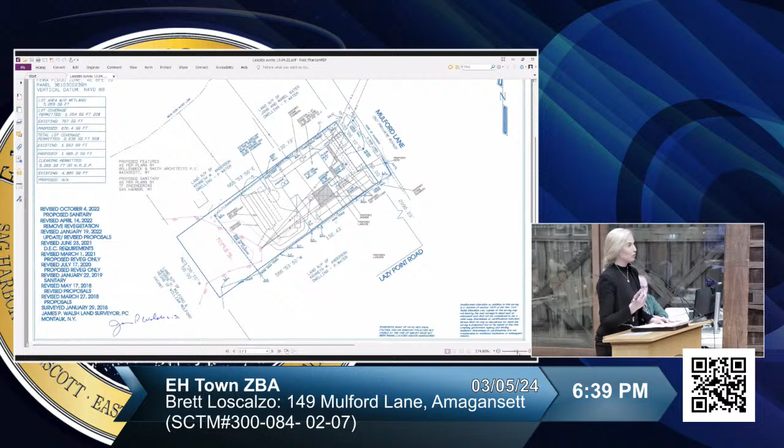Good evening, Chairperson and board members. I'm Deborah Choron of Matthews, Kirst, Cooley, and Choron, here representing Brett Loscalzo, the owner of 149 Mulford Lane. I appreciated the opportunity to make a presentation to the board in late November, and we took your comments to heart and made a resubmission last week.

Our resubmission included three main things. We have a revised revegetation plan prepared by North Bar Property Management dated February 15th, 2024, which includes revegetation using native species in the amount the planning department was seeking, 2,000 square feet. That revegetation is carefully designed to still permit the new IA system and also to preserve the specimen tree in the backyard, which we're hoping we can still do.

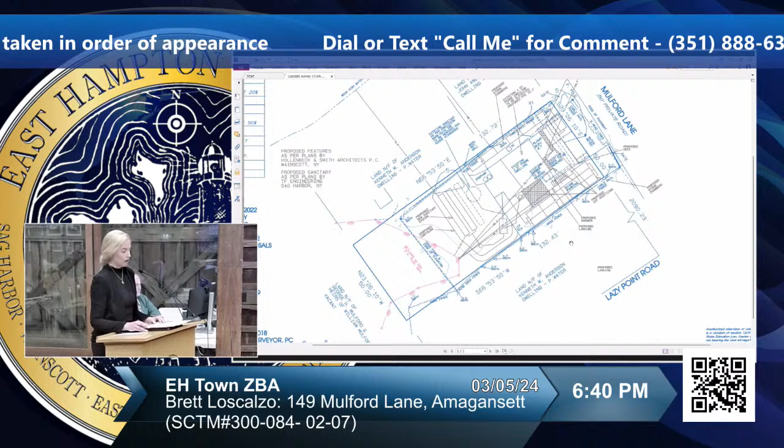An expert report prepared by David Rhodes of TF Engineering, dated February 27th, 2024, includes a thorough analysis of the property and confirms that the location of the proposed improved sanitary system is in the most conforming location to achieve our shared goals for this site. A construction protocol was also prepared by Paul DeLandro of DeLandro Andrews Engineering, dated February 26th, 2024, which serves as an outline for the proposed construction to minimize any potential adverse impacts to the surrounding areas.

So the planning department's chief concern had been the proximity of the new IA system to the wetland. And I've always taken David Rhodes, our expert, at his word that the proposed layout was the most complying location to achieve the goals of both Suffolk County and the Town of East Hampton. In case there was any doubt, David did an amazing job putting together a detailed report showing his thoughts on paper. He essentially prepared renderings of what it would look like if he tried to design the system in the front yard or either of the side yards.

And even at a quick glance of those renderings, it explains, I think, why David settled on the proposed location, and why the proposed location is not only most compliant with the law, but also achieves the shared goal of minimizing the impact to the wetland. David is here to field any questions about that, but I can also get into it a little bit if you have any questions.

For this application, it's once again worth highlighting that with the granting of this application, the property will remain well within its permitted gross floor area, within its lot coverage, its total lot coverage, and clearing. We also note that the applicant is offering this significant revegetation to bring the existing dwelling in compliance with FEMA and to install that upgraded IA system, which I think we all really want.

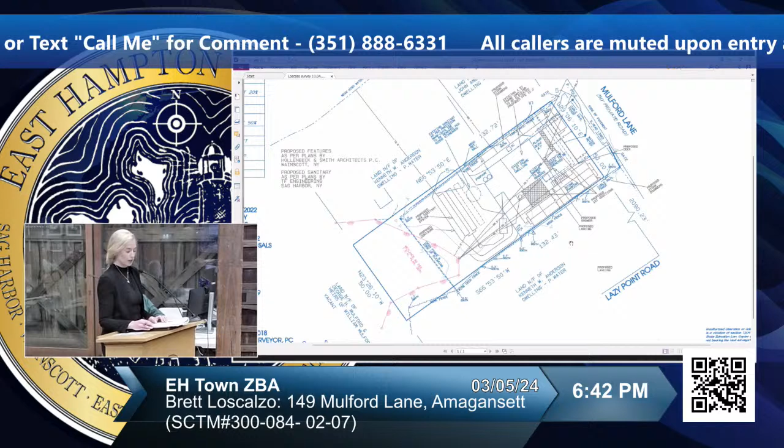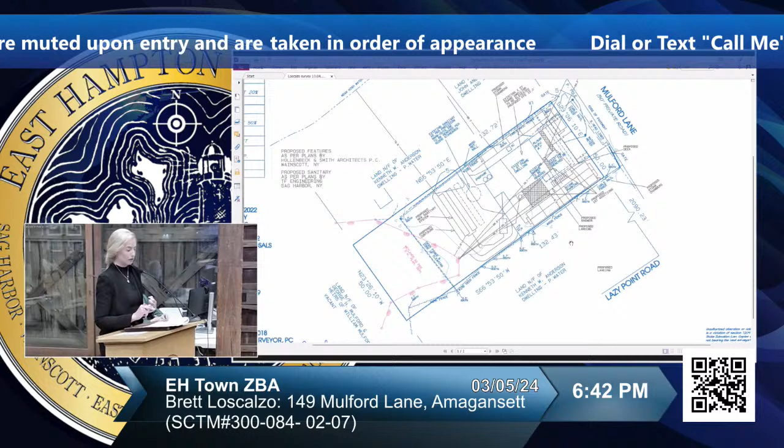Can you do me a favor? Can you just reiterate the list of conformities that you listed? You said this lot is conforming. Oh sure: gross floor area, lot coverage, total lot coverage, and clearing.

So we're not asking for any variances with relation to those big picture items. We're here because the entire property is within natural resources special permit jurisdiction, so any construction we're doing on this property would require us to come before you. Even if we were just looking to put in the new IA system, or do construction work that triggered a building permit, we would be before you.

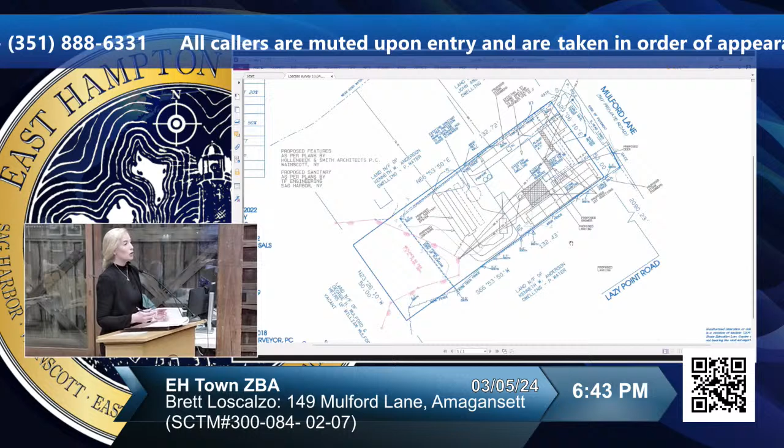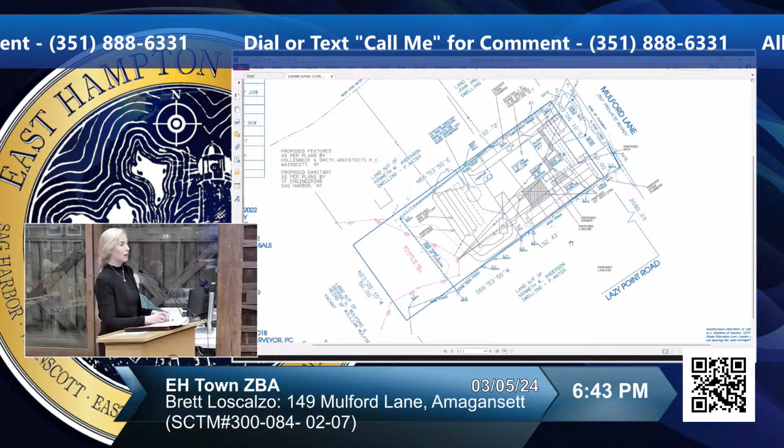So if you look at it in terms of that, we have a 160 square foot addition to a really small house, and we're coming in with FEMA compliance, re-veg, and a new IA system. The fact of what we're asking for really doesn't change the legal theory of this matter, because the addition and its location doesn't change where we could put the septic.

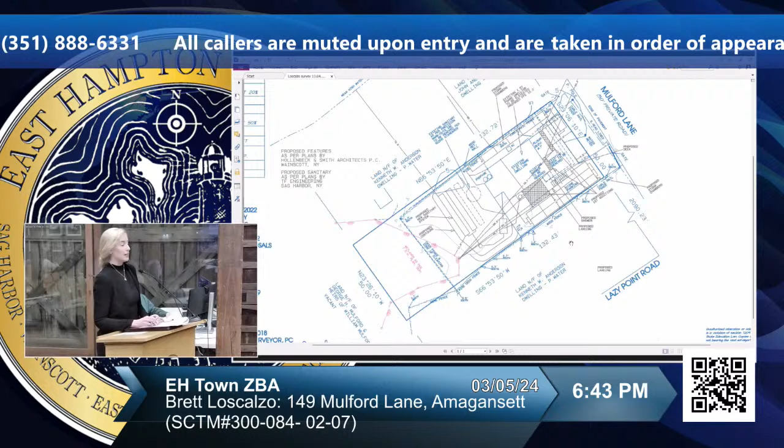But on the issue of the clearing, you're saying that it's conforming to clearing. Yes. But in the TAM, they're referring to an additional 2,000 square feet of clearing. Now, if it's in an NRSP jurisdiction and that was cleared without an NRSP, I'm not sure we can leap to the conclusion that it's conforming.

So right now, as it sits, it's not over-cleared. We're offering to remediate what the prior owner had done. We did concede that point, hearing your concerns and the planning department's concerns, so we're now offering 2,000 square feet of revegetation. That was in our submission last week. I hope that rounds out the application for you and addresses your concerns, because I truly see this application as a net benefit to not just the property itself, but the surrounding area.

Are you done? Yes, if you have any questions, I'm happy. David is probably best to answer some of them, but I'm happy to try.

Thank you, I have a couple of questions based on the building protocol that was provided. On page 5, in one of the first paragraphs, it says additional off-site parking will be coordinated and provided to keep the minimum disturbance to the area. It's a narrow road, we know how sensitive it is, we know how much damage can be done. My question is, how is that going to be provided?

You've said it will be provided. Is there going to be some parking area off-site? What do you have in mind? Typically that envisions that the company responsible for bringing work and materials to the site will coordinate so that employees are not bringing their own vehicles. So they'll coordinate coming and going from the site, and that would be expected.

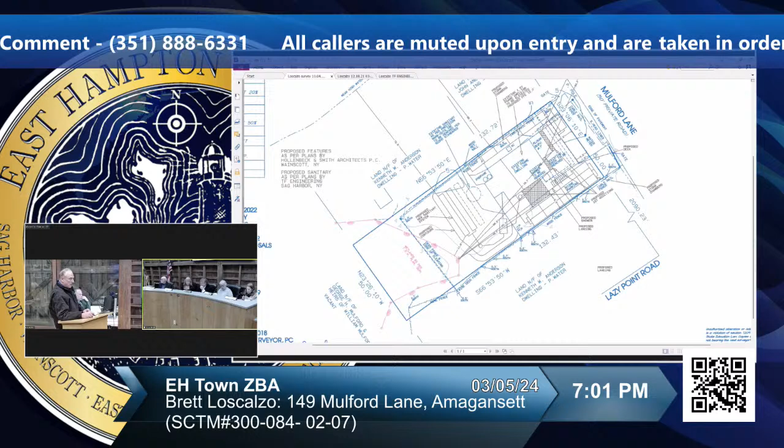I guess I wanted to show the render, if you could show us the render. The question I asked is, of all the interesting variations you provided in the septic options set of schematics, I don't think I saw one where — and again, I'm not trying to redesign the house for you — but it had come up that the bedroom addition on the southern side, in all the options shown, remains in the place where it is right now, as opposed to reconfiguring the additions to the house. Correct? Yes. So I just didn't know if you'd considered that.

Yeah, Brian, can you put up the exhibits? Do you have those? I didn't bring those, no. Oh, okay, we were going to be looking at that comparison on the screen. Okay, we have them.

So the addition is pretty small and kind of centered in the middle, so it doesn't really affect the west side or the east side of the house, and the septic systems have to be offset from the outside of the house. So that's why Deborah's saying it really doesn't matter on that addition, because that's not the most outlying part of the house that would be set back from the septic system.

Dave, are there bedrooms being added in this? I don't think so, no. Not according to the floor plan, it doesn't show that. It says proposed bedroom number 3. Was it a 3-bedroom house before? Is it a 3-bedroom house now? I don't have that information right now. It's on our other plan.

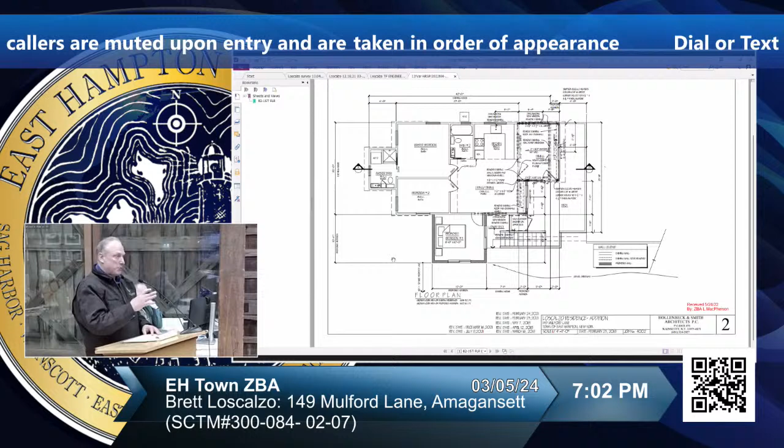So just going through the exhibits, I'll take you through them. If we look at the first exhibit on C1, that exhibit assumes the house is staying in its current location. It doesn't include the minor addition, because I wanted to analyze it without that addition in there. The only location that meets the health department standards is on the west side of the house, so that's why we showed it. That's what we've always proposed, and that's what the health department has approved at this point.

The second exhibit, Brian had talked about what would happen if we went away from the PSD and went towards a leaching pool or leaching gallery. You can see, in order to meet county standards, that layout pretty much takes up the entire property. There's really no room. Not only that, it brings up the retaining wall 3 feet along where the driveway is. Now you can't get up from the road.

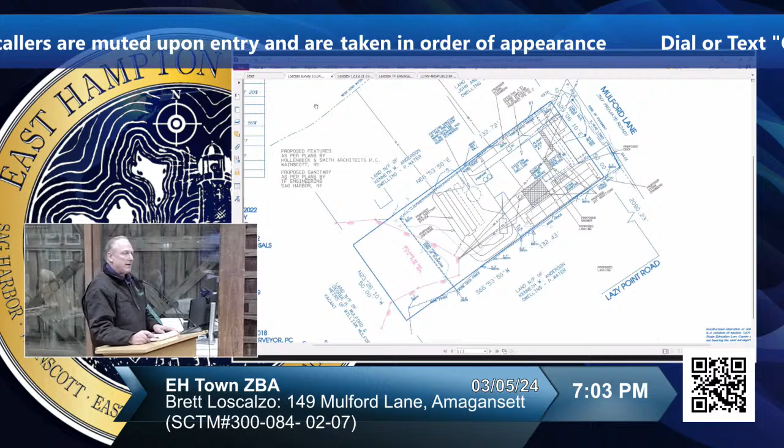So then the 3 and 4 on there. Now, as you can see, this would put the septic system in the front, but it's going to push the house back, so we're 9 feet away and 1 foot away. Our issue with that, and why we didn't even consider it, is because of the amount of disruption to construct a house within 9 feet of a wetland, pouring helical piles, doing helical piles, pouring grade beams and pile caps and all that concrete nearby. We think that would be pretty disruptive all the way right up to the wetland. So even when you're done, you've got 9 feet of buffer after you're done.

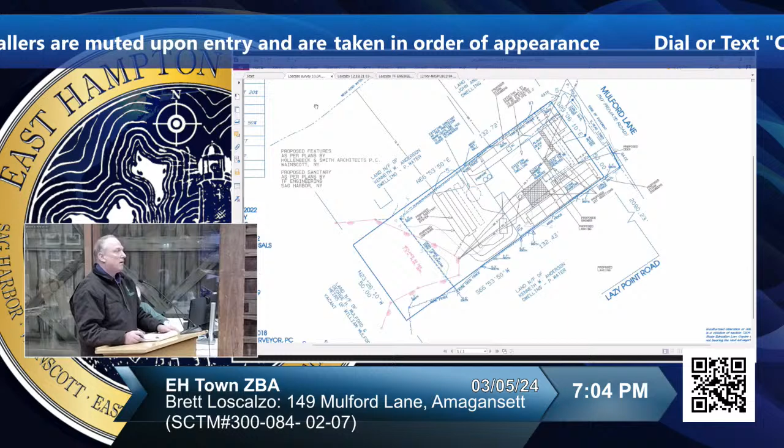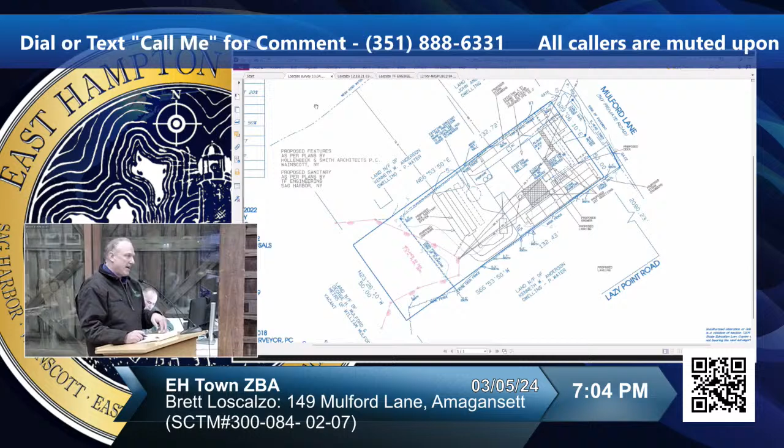So it's the other approach. We got an IA system. It's going to be reducing the nitrogen down from about 50 milligrams per liter down to about 12. You also have this pressurized shallow drain field, which will also do another layer of treatment and reduce the nitrogen even lower than that. So there would be 2 levels of treatment on this, the IA system plus the pressurized shallow drain field.

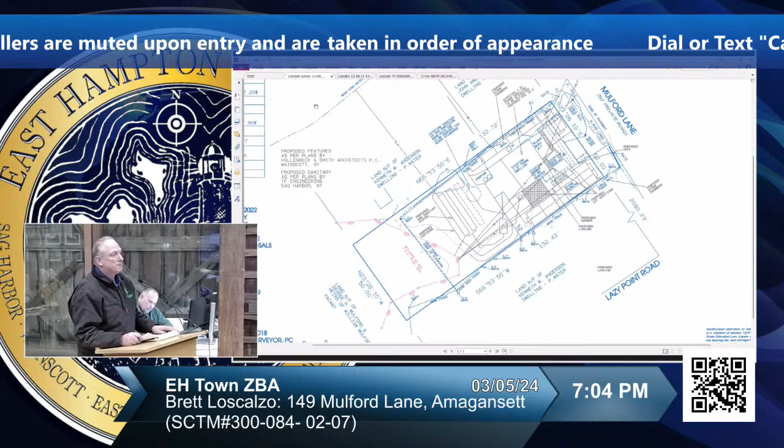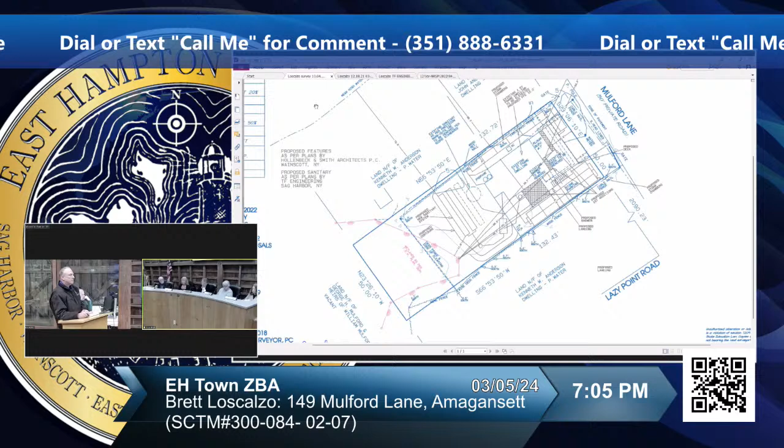So it appears, if I look at the first floor plan, that if there is a proposed bedroom 3, it appears to be an added bedroom because of the notation of the walls. You can see the walls being added, where the existing is outlined and the new is shaded walls. So it appears that there is a bedroom being added.

The smallest septic system the county is going to allow us to propose is 3 bedrooms. Yeah, I know, but again, we're looking at it from an environmental standpoint — is there going to be an intensity of use and stuff like that? Adding a bedroom, just like the health department looks at, could be an intensity of use.

The septic system is a 3-bedroom? Yes. On high groundwater, they do allow a 3-bedroom, but otherwise they normally require you to have a 4-bedroom. Okay, so there is a bedroom being added. Yeah, it's 110 feet of the 160 feet addition.

Okay, I have no questions. No, I have no — let's hear from Brian. I'm fine. Brian?

Good evening, board members, Brian Frank, Planning Department. Do you swear or affirm to tell the truth, the whole truth, and nothing but the truth? I do. Thank you. So just to review real quickly some of the major issues, or the primary issues, that were discussed at the hearing in November.

There were 4 issues really. One was the clearing and filling of the wetland that occurred, by all belief, prior to the current owner's ownership of the property, almost certainly between 2016 and 2018. The concern about the location of the sanitary system, which the planning department maintains very strongly — and I'll get back to that in a moment.

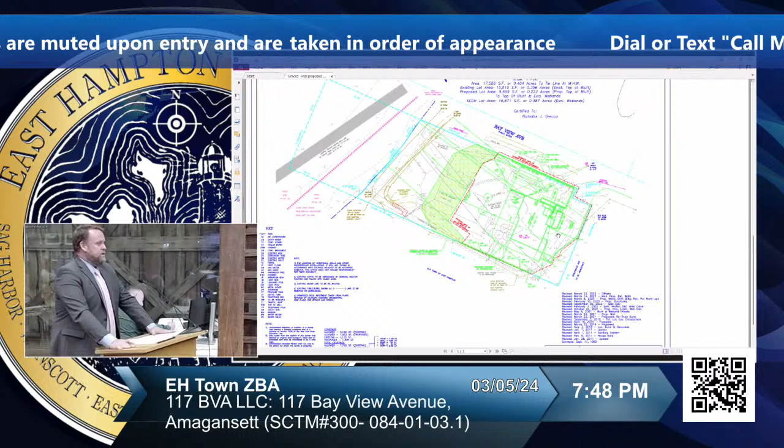I do want to note that we submitted an extensive memorandum of law prior to the January hearing that was ultimately canceled, covering a great deal of topics, including the variance and NRSP standards. We refer you to those. We can answer any questions, but I'm not going to get into those specifics in too much detail tonight. But there are a few other facts I think I need to bring to the forefront here again.

The applicant has spent years, from 2011 through 2017 in particular, putting sand in front of their property in the hopes that it would stem the tide. Those efforts failed year after year after year, a fact that is well documented, as our experts can attest to.

The applicant then sought approval from this board to relocate the residence landward without a revetment. In 2019, that application was denied. As the erosion continued, the applicant and their neighbor at 114 Bayview Avenue were forced to obtain emergency building permits to install the geocube wall that presently exists today.

As the applicant's experts have each attested to, it is only this wall that has protected the applicant's property and their residence from succumbing to the erosion that has taken so many other properties and residences that existed previously.

So I want to take a moment. Member Johan adeptly pointed out that the geocubes are going to be a topic of discussion, so let's talk about them. I expect them to be a major point of contention by the board and the neighbors.

To be clear, the applicant wants the geocube wall removed as much, if not more than anybody, more than the town and more than the neighbors. This is by no means a circumstance of the applicant dragging their feet, happy with the status quo that the geocube wall presents.

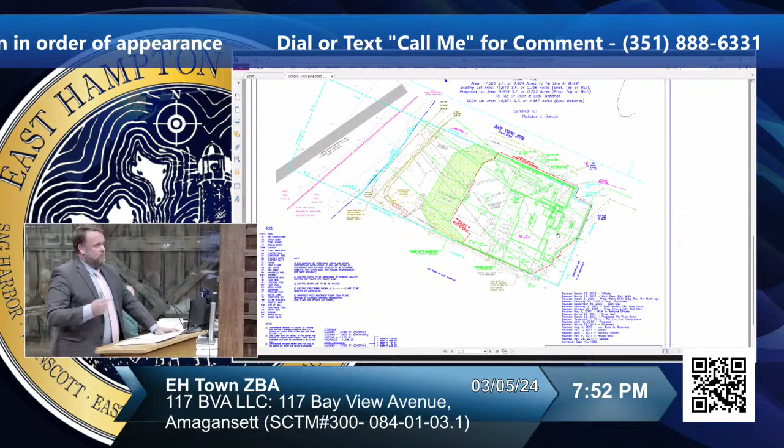I think it's important to note that the concept of leaving temporary erosion control structures in place is something that the town itself is familiar with, certainly now, while the Fire Island to Montauk project...

60 years in the making, finally brought roughly 450,000 cubic yards of sand to downtown Montauk. The sandbags that were in place, I think, were in place for roughly 8 years. Where would those hotel owners be? Where would downtown Montauk be if those bags were removed before that work was done?

Here, the town has no grand coordinated plan to protect this area of beach and to protect these property owners. In this instance, in this area, property owners are on their own. Nobody's bringing erosion control relief to 117 Bay View Avenue except for the applicant in the form of immediate surrender of a 30% reduction of their property by moving the revetment further landward and retreat of the house.

So I want to turn back to the application itself quickly. The applicant is again asking to demolish the existing residence and strategically retreat 78 feet landward for a house that is less than 10% larger in GFA. At its present location, the house is not sustainable.

They're looking to replace the existing leaching pool system with a new IA system and relocate that further landward. The new system requires retaining walls and elevation of a drain field in order to obtain the 2-foot separation. From our review of the EAF and the planning department's review, they have agreed that the IA system is located in the best possible area.

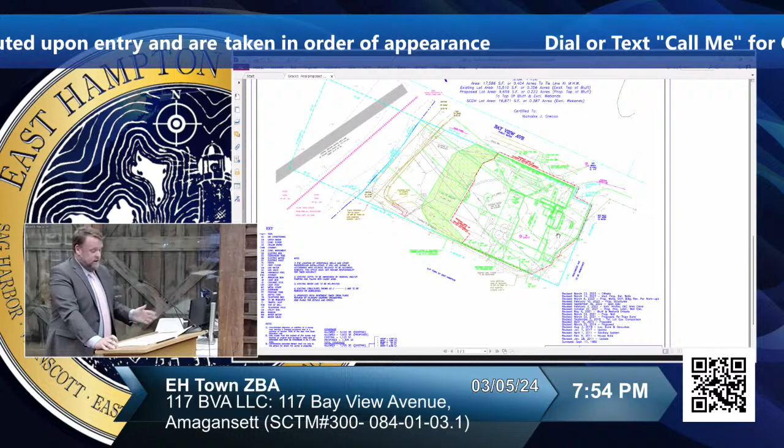First, SEQRA. As this board knows, counsel knows, any action taken by this board is subject to SEQRA. SEQRA is governed by very strict procedural requirements that, respectfully, none of which were complied with in the processing of this application. SEQRA determinations are, by law, required to be made as early as possible. The reviewing agency is required to take a hard look, identify and review areas of legitimate environmental concern as early as possible in an application process. That did not happen here.

Instead of taking action as early as possible, upon receiving an application in May of 2021, nothing happened, aside from the threat to remove the geocubes by the town board this past summer. The town did nothing on this application until the applicant was forced to commence litigation in October of 2023, 2.5 years after the application was filed.

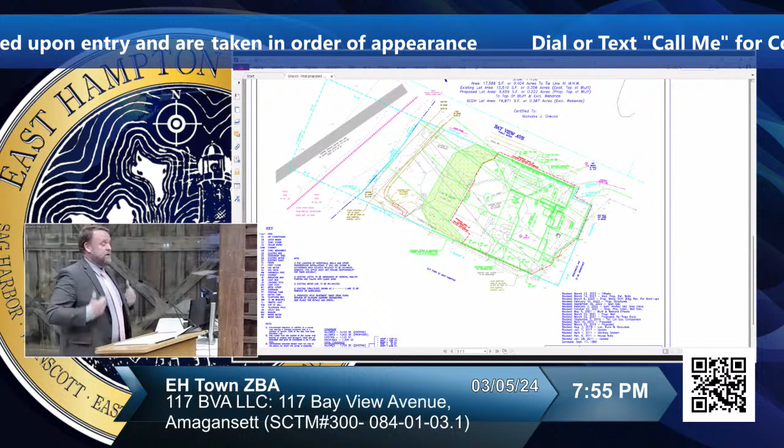Brian, when did the EAF Part 1 get filed? The EAF Part 1 got filed in January. This January. It was never asked for. Nothing ever was received on this application, substantively, to review this application, until a mandamus action brought under Article 78 was filed by the applicant against the town this past October, mandating that they review, pick up, review this application and present a technical analysis memorandum, allowing us to get to this point.

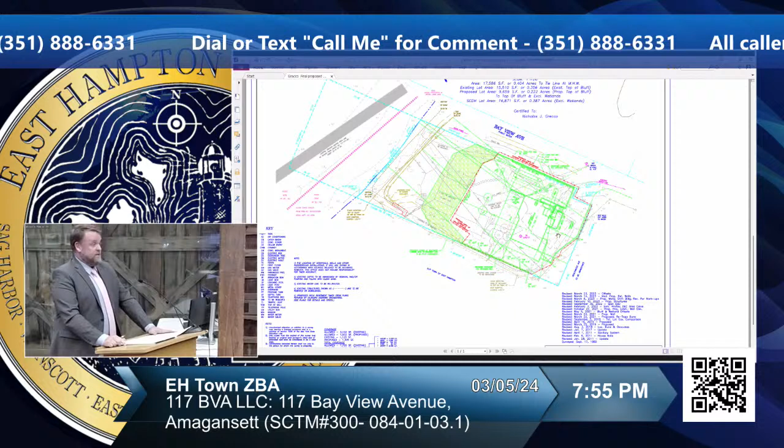Even then, despite a stipulation of settlement being signed saying the TAM would be prepared and provided, the town instead produced an EAF, asking that a pos dec be adopted and a DEIS be required. To be sure, the planning department is keenly aware of the difference between a TAM and an EAF requesting a pos dec.

Again, if this was your property, I suggest that none of you would be happy about how your property and your property rights were being treated. Not only has the town failed to meet the procedural requirements of SEQRA, but its substantive requirements as well, as there's no rational justification to adopt a pos dec and require a DEIS on this one-off application.

First, it ignores the circumstances our client's home and property face: erosion over 3 to 4 feet a year. It ignores the fact that soft solutions have been tried and failed for over a decade. It ignores the fact that the geocubes are well past their useful life, and a report to that effect has already been submitted to the record. It ignores the fact that every expert appearing for the applicant has repeatedly stated that a hard solution, a hard revetment, is the only way to do this.

Adopting a pos dec and requiring a DEIS does not further any goal of SEQRA or the town code for that matter. The town knows full well what impacts there are, if any, of installing revetments along this coastline, as the board reviewed a number of them, some of which have been granted, some of which have not.

A DEIS is not required to identify or mitigate any impacts. As the experts will discuss, all of the impacts have been identified, and all of the mitigation has been presented by them. The only goal a pos dec and a DEIS serves is to further delay our client's application and delay their ability to improve and protect their property.

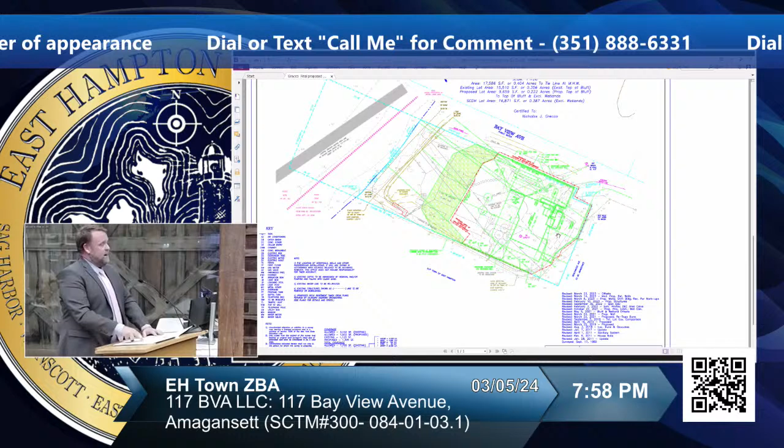If, however, the board is disinclined to adopt a straight negative declaration, there's another avenue that we put in our memorandum of law that we submit is a proper way forward here, equitably and legally. And that is the adoption of a conditioned negative declaration. We won't get into what that entails, it's in our submission, but that allows the board to have coordinated review, to discuss this matter with the DEC, to make sure that any impacts the board believes may be associated with this are addressed and mitigated. Again, equitably and legally, we think that's the best way to go.

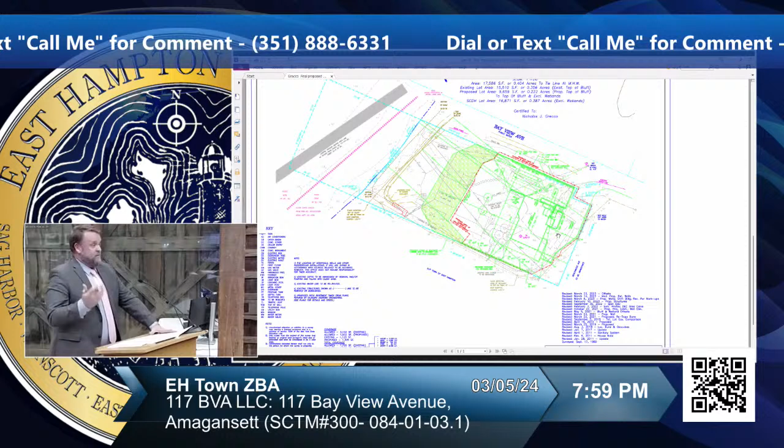But even if they're referring to the proposed revetment, the planning department, under section 150-30B and 150-50D of the town code, has an obligation to present to the applicant alternatives that would allow the application to be consistent. That's not been done. So if the planning department's going to insist that this is not consistent, they have an obligation to come forward and say how it would be. We welcome that discussion, because all other alternatives have either failed, been explored, and they're not feasible.

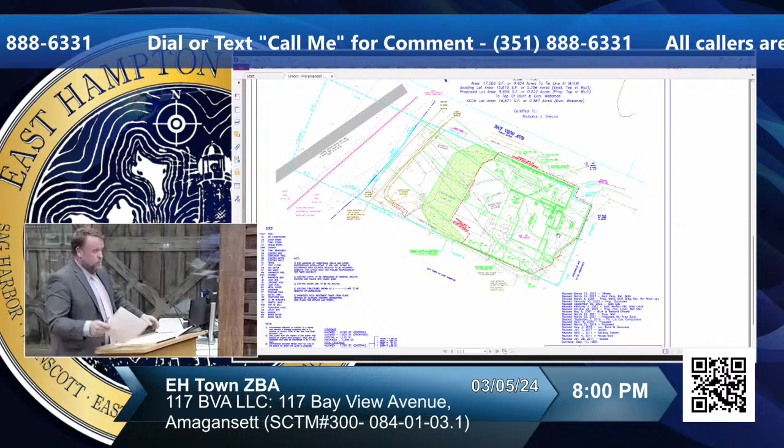So right now I want to turn it over to our first expert, Aram Terchunian, unless there's any questions from me. But again, the threats facing our client's property are very real, and the time to allow them to do something to protect it is now. Thank you.

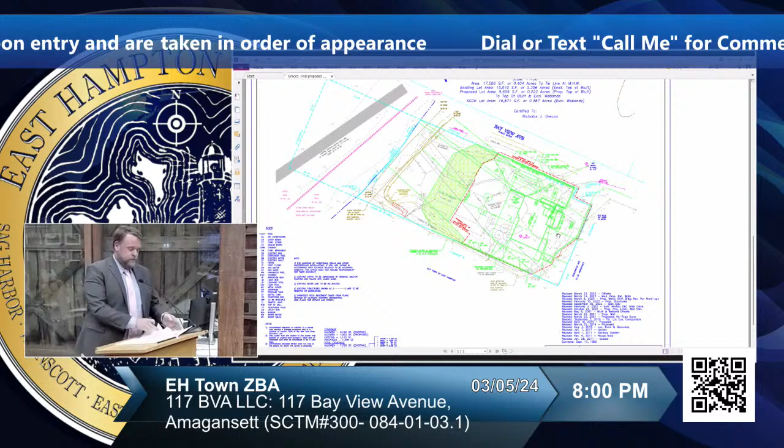How you doing, Aram? Good to see you. Introduce yourself. Aram Terchunian, First Coastal, Westhampton Beach, New York, on behalf of the applicant. Thanks, Aram. Do you swear, affirm, tell the truth, the whole truth, and nothing but the truth? I do. Thank you.

Good evening, Mr. Chairman, members of the board. I have some photos that Brian's going to put up on the screen, and I'm going to give you some handouts that you can keep.

Thank you. Maybe I had two here. There are two, okay. We'll go into the record. You need one more? Sorry. Brian, if we go to the other aerial photo, please. Would be 84. No, yeah, that's right.

The first thing that I'd like to bring to the board's attention has to do with the source of erosion and accelerated erosion here. Obviously, erosion is a natural process, it occurs all the time. But there are circumstances where erosion can be accelerated, and that's what's happening on this site.

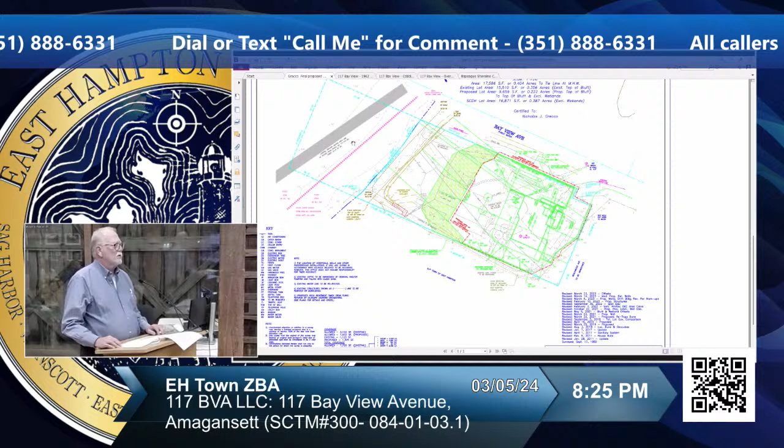However, the offshore breakwater has several severe negative effects. It would potentially eliminate littoral sand transport to the west. A tombolo would likely form from the breakwater—sand accumulating and attaching the shore to the breakwater. It would also occupy a significant amount of benthic habitat. While an offshore breakwater could potentially be designed for this location, I think the negative effects outweigh any potential benefits as an alternative.

The fifth alternative was rock-filled gabions. Gabions are basically rock-filled baskets, similar to...

I'm just going to ask if we have your report. This is not in my report. Okay, but we're dealing with a lot of scenarios here that probably have no significance to this application. If they don't, I'm not sure. If they do have significance, I encourage you to move on, but if they don't, then I would say that. There was a suggestion that we hadn't considered alternatives, so I'm addressing the concerns that were put forward. But those alternatives should be in. Go ahead. No, go ahead. No, scratch it. I only have a couple more and I'll be done. Thank you. So we're up to six.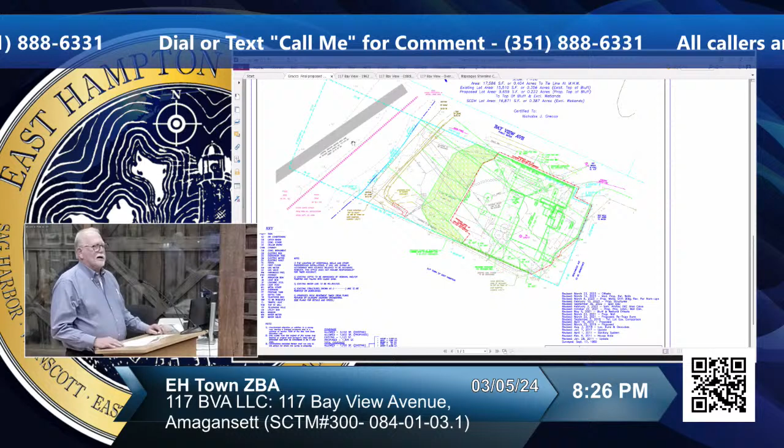The rock-filled baskets are made either out of wire mesh or geotextile, both designed as short-term protection. The wire baskets can degrade over time since they're metal wire, usually rubber coated or heavily galvanized, which will eventually break down. The geocubes break down under UV radiation, and once they fail, the rocks are left stranded in the near-shore zone and on the beach. Repairing the structure is not a simple matter.

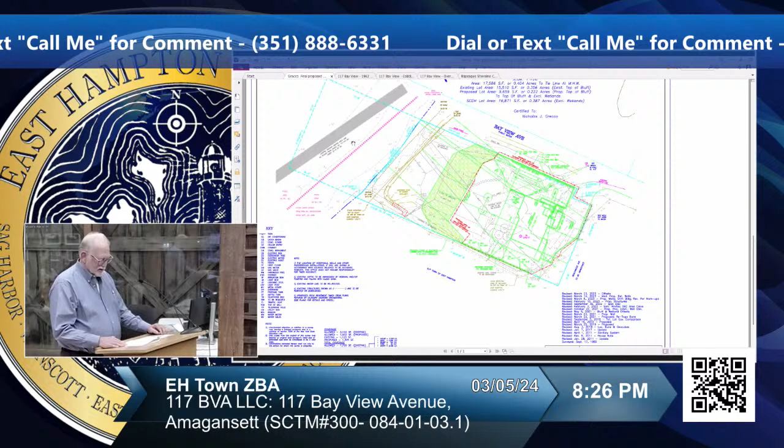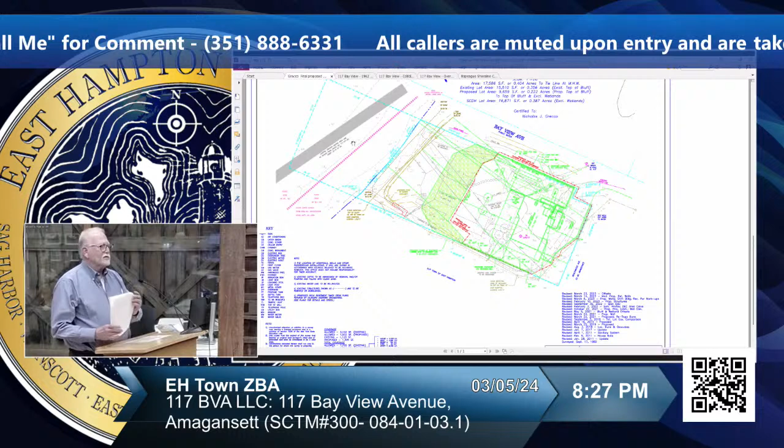The sixth alternative was fiber rolls—basically coconut fiber in a long tube. They're usually installed on a sloping bank and can reduce wave energy and reflected wave energy at the property. The problem is similar to the others: they degrade with UV radiation and aren't really designed to withstand open wave attack. Once subject to storm surge and wave attack, they become saturated and can be pulled out.

A saturated fiber roll can weigh several hundred pounds, and they're not easy to remove from the nearshore environment—I've actually had several projects where we've had to do that.

The seventh alternative was PEMs, which were installed to the east of the project. Just to cut to the chase, I've really never seen any evidence that PEMs have worked or resulted in significant accretion, so I would not consider that.

The eighth and final alternative was the gray-green infrastructure, living shoreline solution. The gray solution is the rock revetment; the green is the sand cover and beach nourishment proposed. The sand cap and advanced nourishment would be excavated from behind the geocubes and reserved. The revetment would be pulled shoreward, with the toe about 35 feet shoreward.

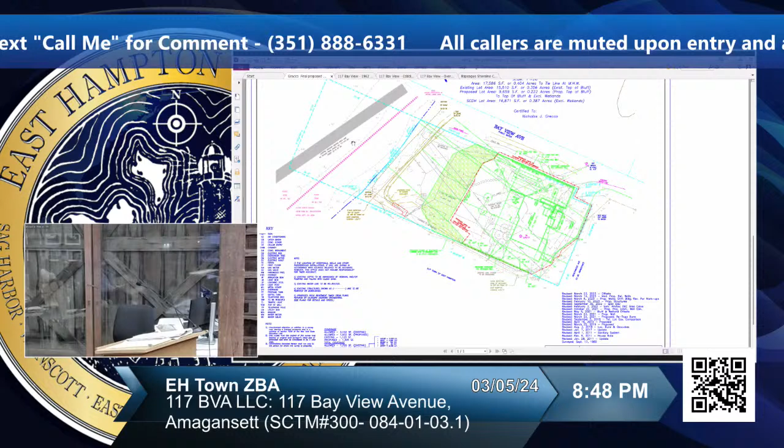You can see the location of the rock revetment in the shaded area here. You can see that the mean high water line was located back in 2021. It's really not accurate anymore. The water line, at least for the most part, is pretty much contiguous to the geocubes.

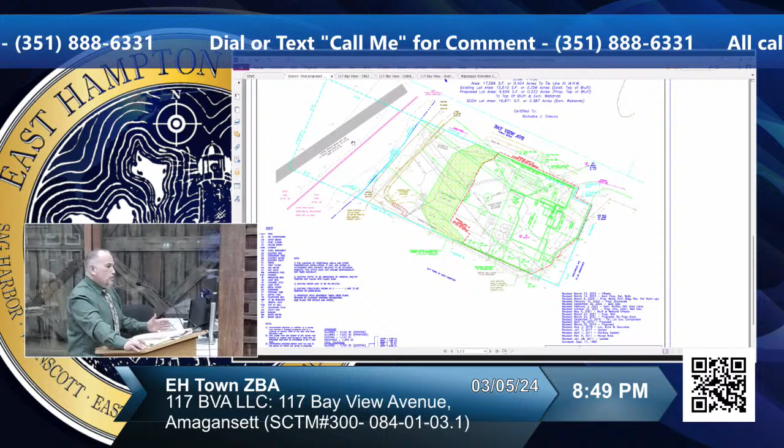And I have some photographs, a lot of photographs. I'm going to spare you most of them tonight and just share the ones that I think are most pertinent to the discussion, which show the dynamic nature of the shoreline and how the structure that has been there has interacted with it.

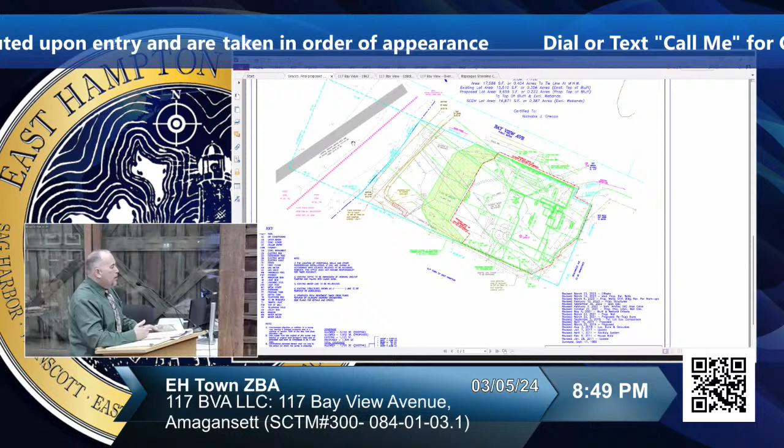And I think it's fair to point out that we are not here to discuss the geocubes per se. We're talking about a rock revetment that is going to be about 30 feet landward of it. But this is what's here now in a dynamic environment, and I think the photos over the last few years are pretty illustrative. I'd like to share them with you now.

Hey Brian, what's the date on that survey? I can't read that. Me too. March 23rd, 2023.

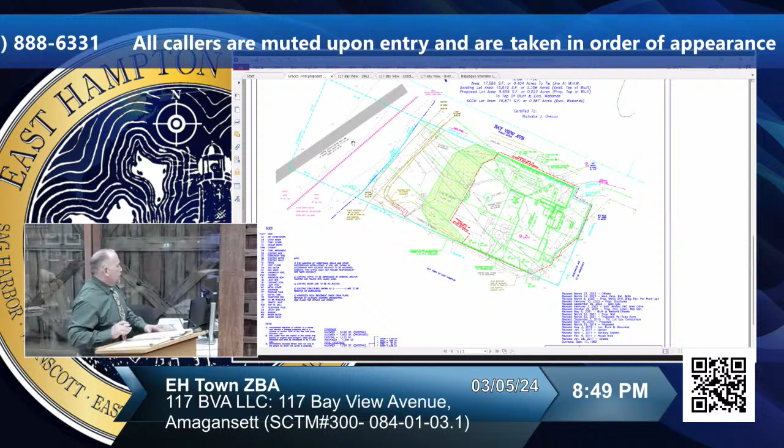I'm fairly confident that's the most recent survey. The most substantial revision of this survey from its predecessors is that the sanitary system has been relocated from an area adjacent to the southern property line to a better location on the property. But I'm going to show you the shoreline changes here.

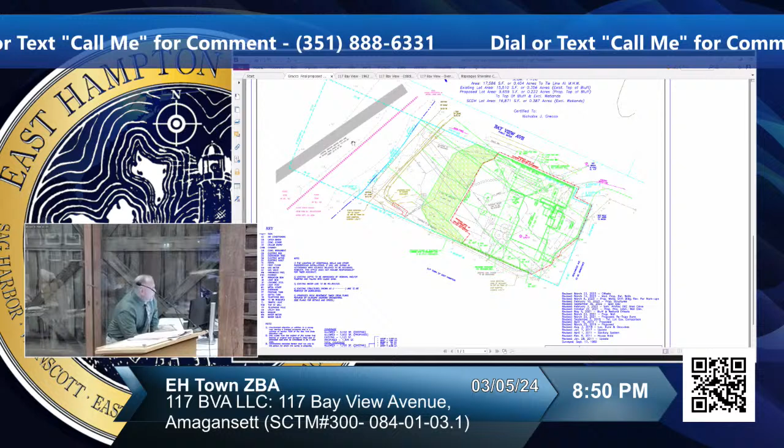I'm sorry, just give me a moment. Here, I have it. You found it? Yeah, it's in the back of this. Yeah, okay, it's in there. Yeah, you have it? Yeah, sure.

So I think for the moment we have seen enough aerials. The only one that I'm going to dwell on for a moment is 2007. It's the only one that I included topography on, because our topography comes from 2006 LiDAR data, so these contours best align with the elevations on and adjacent to the property.

Again, this is the one foot contour interval down here. This is a one foot contour here. Most of this is two feet above sea level. So again, this road end was naturally shouldered by two very low areas that are prone to inundation.

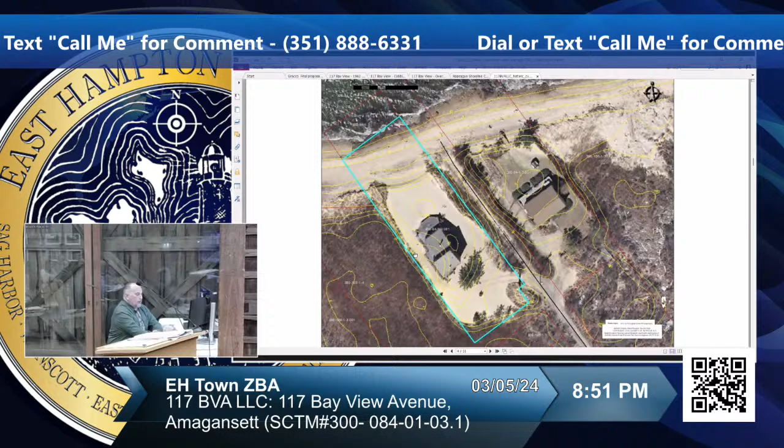This is the wetland. So there is some truth to the fact that coastal wetlands do get overwashed, and that is a natural cycle of things. But when you have end scour and waves interacting with a hard structure, you're exacerbating that, you're accelerating that. With respect to Dr. Weischer's comment that this is good and natural for the marsh, that is flatly incorrect.

Or better than flatly incorrect, grossly oversimplified, I think is a more appropriate way to put it. Yes, marshes need to keep up with sea level rise, but episodic dumps of sand concentrated in a location like this, and you can tell this is the corner of the property, this is not benefiting the marsh. What it's doing is reducing the capacity of this wetland to act as a sponge, to hold water for a prolonged period of time and let it seep out slowly.